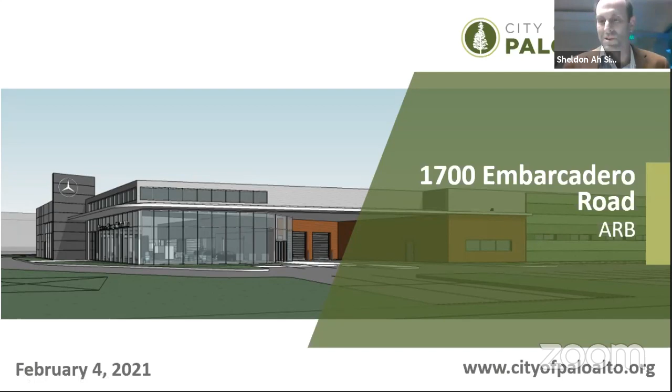So here we are. So some things change and some things remain the same. Welcome to the new year. We're back with another iteration of this site. We'll go a little bit more about the background here in just a moment. Great overview by the chair. It's a preliminary review of a commercial project located on 2.5 acres. And this is just at the corner property. Does not include the Audi site.

It is zoned CS with the site and design combining district as well as automobile dealership combining district. Request for the applicant would be an architectural review, site and design review, as well as design enhancement exception for setbacks. And we're just here to review and provide some comments to the applicant as well as to staff.

This site has been a subject of many projects and as well as hearings, 16 public hearings to date. The site is a vacant site, a former restaurant that was closed in 2014. The site was rezoned to CS from industrial in 2009. A hotel was previously approved in 2013, but that entitlement expired in 2015.

An automobile dealership was proposed in 2015 for the site. That project went all the way to the city council, and then it was directed back to the ARB. It was deemed too big and didn't fit in with the context of the Baylands, so the applicant withdrew their application.

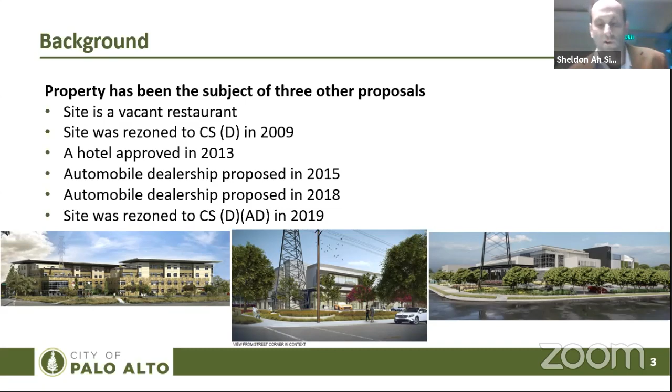So a little bit about the site context. It's located in an area that's predominantly commercial and office use. The two properties adjacent along Embarcadero Road are dealerships, the Audi and the Honda site, and there are also some automobile uses behind on one of the streets there.

The properties in the area are generally characterized by larger buildings with large setbacks and surface parking. The one exception is the Audi showroom, which has the closest setback to Embarcadero Road at about 30 feet. All the others have larger setbacks.

On this property, 1700, there's an 80-foot easement along East Bayshore for various utilities, including the overhead transmission line. This precludes structures from being built there, especially height-wise, with a height limit of 15 feet for structures, which includes vegetation.

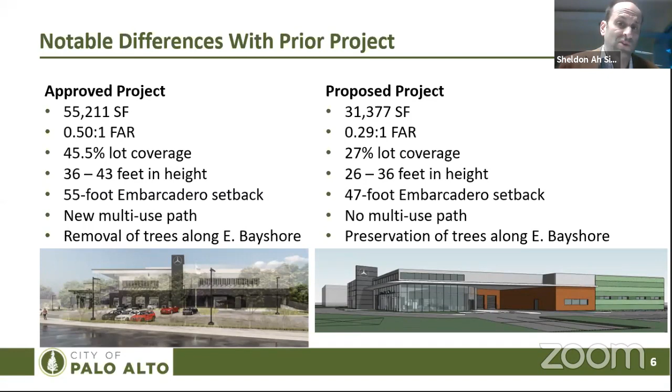The approved project had a multi-use path; this project does not propose that. The approved project proposed removal of trees along East Bayshore, and this project does not propose that at all — it preserves those trees.

A little bit more about the site plan massing. It shows that it will follow the predominant pattern in the area, with larger setbacks, surface parking, and the building situated in the middle.

The CS zone does require build-to setbacks, which mostly makes sense in the El Camino Real area to get the building close to the pedestrian realm. This is an automobile dealership, an automobile-oriented use, and coupled with the easement constraints, it supports the design enhancement exception. The height of the building would also be mostly consistent with the surroundings.

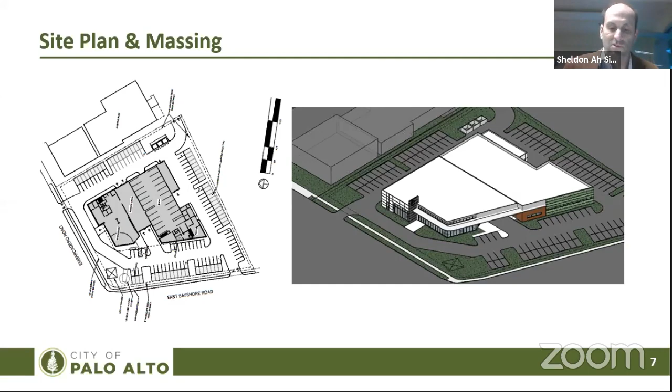Again, 26 feet — it's a standard two-story type of building. The covered drive-through for service is exempted from the gross floor area, consistent with the automobile dealership combining district, and that area is 4,400 square feet.

Just showing some of the floor plans here. The exhibit breaks down the showroom in yellow and the dealership area in green, which includes the service area — the service drive, as mentioned, is excluded. There's a little bit of limited second floor space with some offices and storage areas.

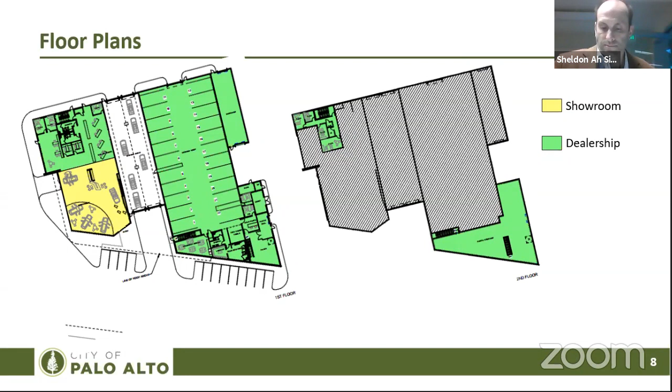So going to the elevations here, and the applicant will discuss more about the materials. The project is again 2 stories in height in some areas, but it does roughly maintain that 26-foot plate. And then you have that 36-foot architectural element, which would have the future sign.

Along this elevation, the building and the site have kind of an irregular shape. But generally here at the corner, you have the showroom, which has the fenestration. And then you have some of those elements that are consistent with the brand of Mercedes, which is that black color, the silver colors, so that metal that's being used there, and some of that white.

They are introducing some of that reclaimed wood siding, as well as a landscape wall, which is more consistent with some of the features that we had in the prior element of the prior project, trying to bring in the consistency with the baylands.

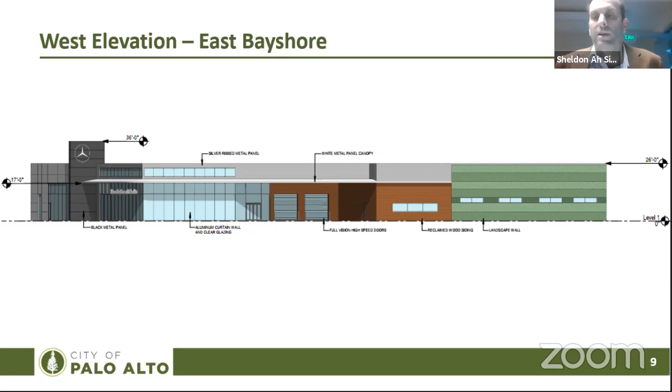And on the opposite side of Bayshore faces Audi. Then here you have the silver panels closer to the street. And then as you get towards the rear of the property, it transitions to a stucco type of material.

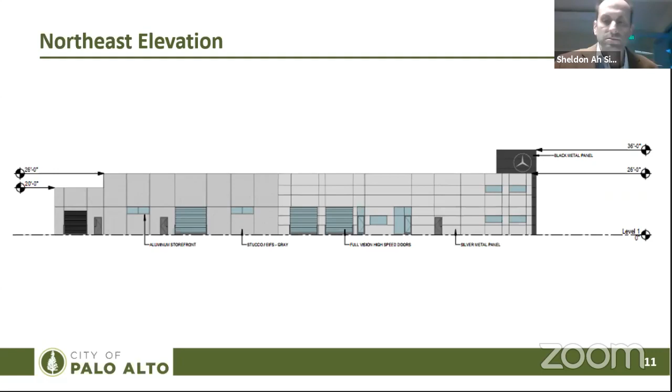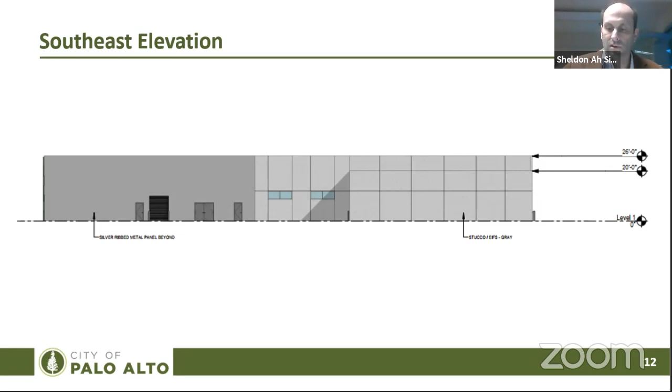And opposite of Embarcadero, you can see on the left side a little bit of that landscape wall really terminates there. And then it transitions to paneling closest to the street, and from there it turns to stucco towards the rear of the building. This is the side with the car wash.

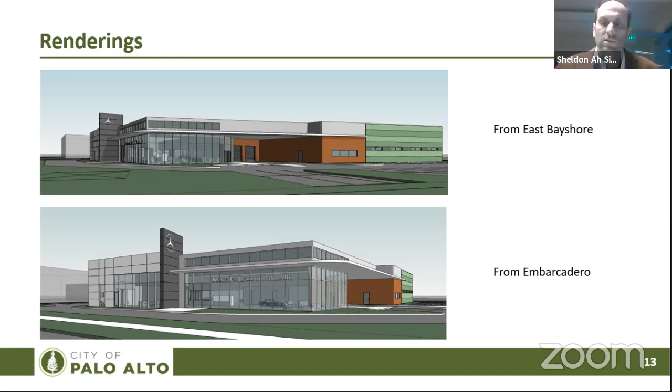So the renderings just show a little bit more detail here. Obviously, this is at the preliminary stage, a little more conceptual. We'll ask for more detailed, contextual types of exhibits for the formal submission.

With the landscaping, as we expect with a smaller footprint, the project on the left side, prior project on the right side, you have more opportunities for landscaping. And as I mentioned, they are saving those trees along Bayshore Road and Embarcadero Road.

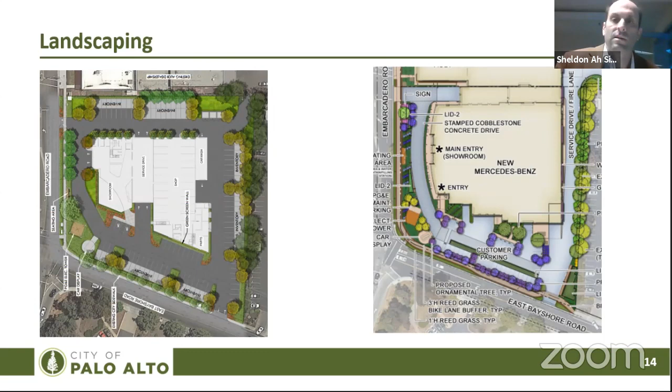Some considerations here to think about, and what we're looking for is some feedback from the board on how the project fares against the required findings. Some of these are just relationship to the neighborhood setting, the context, the transitions in scale to adjacent properties, as well as the scale and mass, and then architectural design theme

cohesiveness, use of materials. We need to consider how the project is consistent with the Baylands master plan: to use only muted natural colors, choose materials and finishes that will weather well, preserve the horizon line with low and horizontal elements, reduce the size and signs and mounting heights of regular signs, and also just design for practicality.

I think we have a lot of experience on this site with the other two projects, and this project tried to bring some of those features here, which we can probably hone a little bit more. And then lastly, just the pedestrian-oriented design.

And so that brings us really to the multi-use path, which I think is something worth considering to look at. The city's bicycle pedestrian master plan does indicate that there's a class 2 bicycle facility along this frontage, but when you actually go out there, that does not exist. There's no facility such as that.

The plan does not prescribe how to address a gap in that situation because it assumed that there was something there. We knew that, staff knew that. So when we were having discussions with the prior applicant for their request, and their request again had a legislative request for the zone change, we negotiated to get this gap reconciled. So this multi-use path was something that was proposed by the prior applicant.

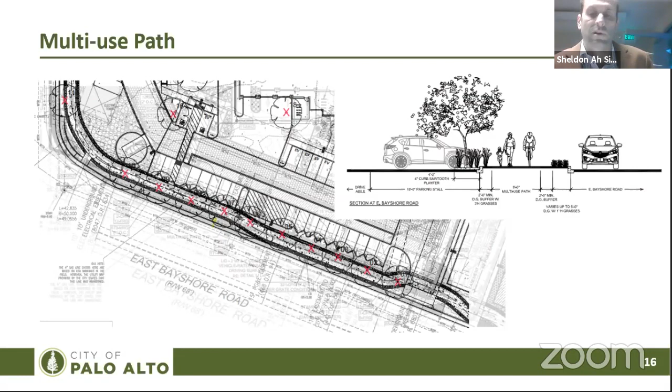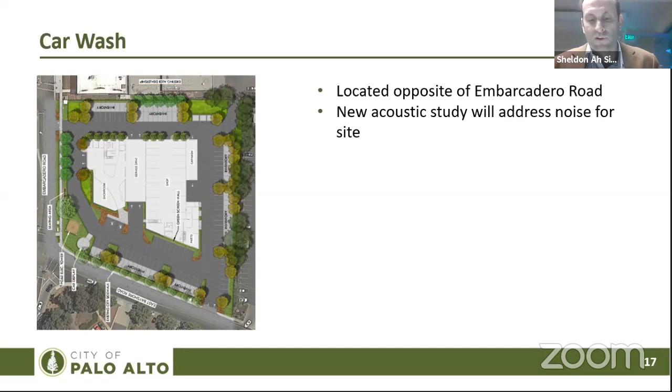The other issue we noticed with the last project was a car wash still facing the neighboring property that had the objection to the issue. So with this project, we'll have to have a new acoustic study that will address the noise for the site. The site does not have any backup generators, so that would help a little bit. But certainly we will have an updated acoustic study that will address the issues and be consistent with the municipal code. So that ties into CEQA.

The prior project had included an adopted mitigated negative declaration. We would propose to provide an addendum to the previous document, and we'll include updated studies, which are acoustic and traffic analysis, that will be included with the formal application. So with that, we'll be conducting the public hearing, provide direction on the project, and the applicant will consider those and file a formal application.

Staff recommends that ARB take the following action, which is to review, provide comments, and no formal action is requested. So with that, I conclude my presentation, and thank you.

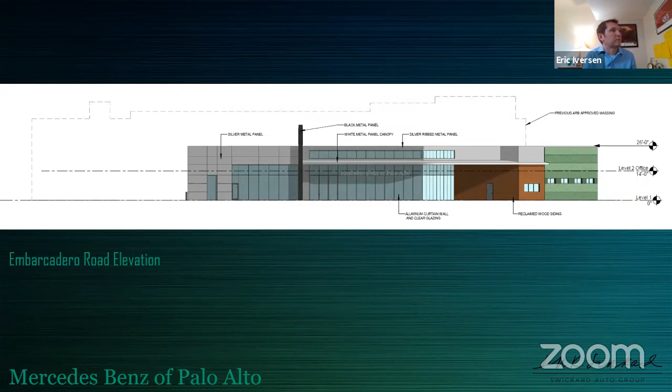And again, this is the side view from Embarcadero. You're starting to see some of the fun stuff, which is the reclaimed wood siding and the landscape wall to really break up that overall facade. You have the modern glass and architectural composite panels along the front going into a reclaimed wood product.

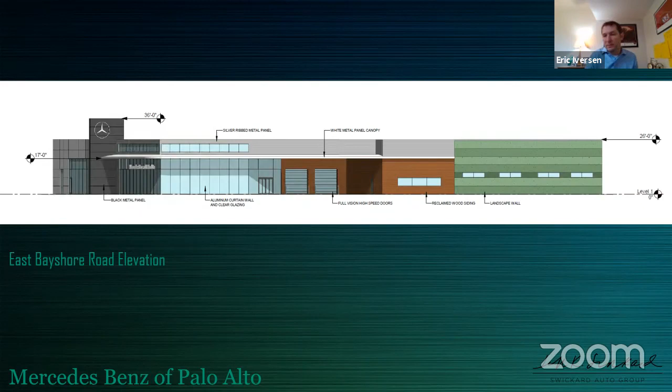If anybody has any questions, I could talk for 15 or 20 minutes just on how awesome and cool reclaimed wood is. And I think landscape walls are great, especially in the climate that we have in Palo Alto.

The plan itself on the inside does separate what we call front of house and back of house. Along Embarcadero is the front of house with the showroom - it's the part of the car dealership that we're all familiar with. Showroom, service writers, separated with a service drive that has opening and closing doors. Weather is great maybe 9 months of the year, so those doors will be open during the day but closed at night for the service drive.

And then the actual service shop with 22 bays to work on cars. The car wash, in this proposal as opposed to the previous one, is attached to the building, so it's approximately 40 feet further away from the property line than the previous proposal.

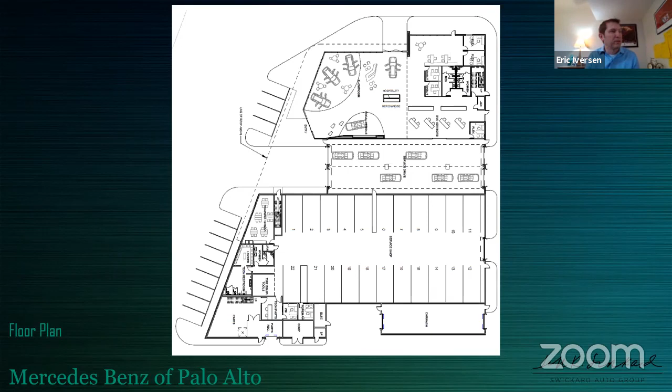So the acoustic study, as Sheldon mentioned, we will get that updated. We've talked to the same acoustic engineer. Common sense tells us that moving that facility farther away from the property line will only reduce noise.

We've brought on the same landscape architect that had worked on one of the earlier proposals, and I think we have ourselves a pretty good landscape plan. Again, preserving those trees along East Bayshore is critical, at least in my mind.

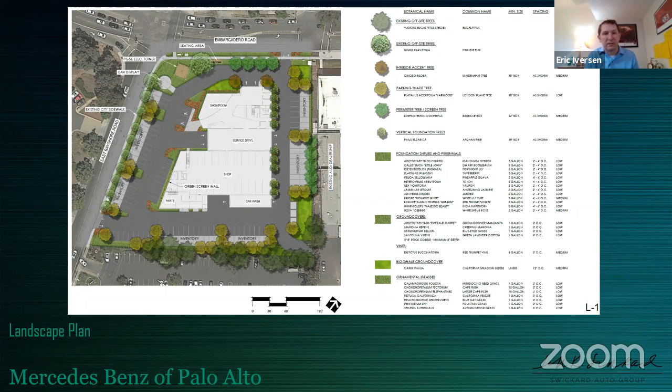Reclaimed wood product - like I said, I could talk for a half hour on that. It is an awesome product. The company goes around to churches, anything that's being demolished, not only in the United States but around the world, and they salvage it. They re-mill it, replane it, and then send it back out to get installed on a building.

The green wall that we talked about is not just vines growing up the side of the building. It is actually a green wall with vertical planters, and should an area or planter die off, they can be removed and rehung with a new one grown in a nursery, to always have a fresh green wall appearance.

And then finally, once again, my favorite trees. I don't think I'm going to stop talking about my favorite trees because they provide excellent shade. They are under and adjacent to high powered lines, so it would be really hard for us to replace those with anything that's going to get much more than 8 to 12 feet tall. Here we have established trees that provide excellent shade, whether you're walking or biking on the street, either way.

So that's all I have. I am able to answer any questions, and our architect, engineer, and landscape architect are all here to chat with everyone.

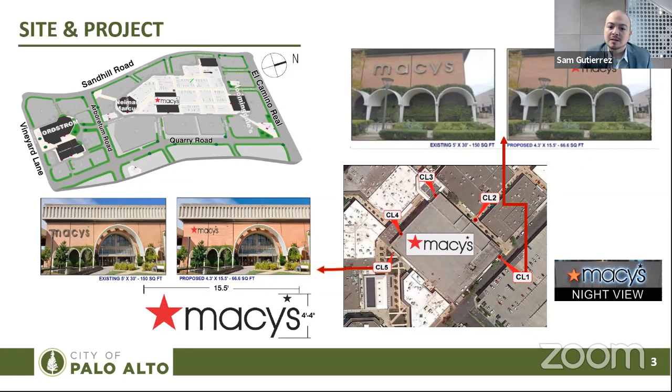So here's the site. Again, we could see the Macy's located here. I hope you all could see the cursor as I'm hovering. These are the proposed large signs for the Macy's with their relative location pointed out. It should be noted that the signs are illuminated. So the star logo, the corporate Macy's star logo, is internally illuminated, while the Macy's copy is halo illuminated.

So here we see that there are other signs located at the corners, and I would say the interior mall entry at CL2, over the doorway there with the awning. And then you see to the left on this slide the corners of the Macy's building. If you're entering from the parking lot in Sand Hill, or coming from further down the way, like towards El Camino, and you go down that walkway, you'll encounter these signs at the corner of the building.

Again, the applicant's proposing to change out these signs. Just a note, the brick panels around the facade of the building are 24 feet wide, with pretty large band spacing - there's about a 5-inch separation between each of the facade panels. So that's just something to note as the ARB considers the proportions of the signs and the layout on the building.

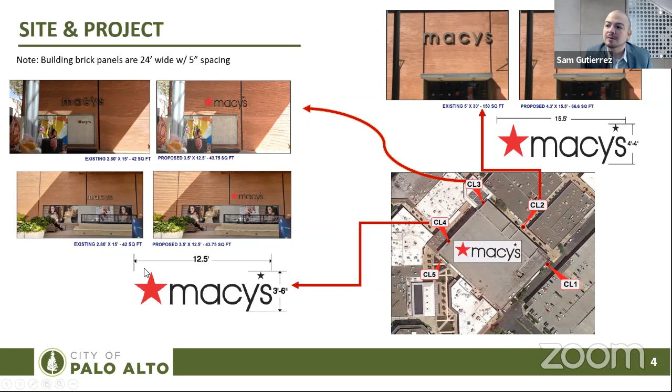So the existing signage versus the proposed - again, the existing signage does not comply with the master tenant facade program. It does comply with the sign code, however. If we were just to apply the Palo Alto Municipal Sign Code from Title 16, the signage on the building, the wall signs, does not exceed the limitations per that code.

The applicant is proposing smaller signs than what's existing. The conflict is that if we apply the master tenant facade program limit for the signs, they would be limited to only 24 inches tall - only 2 feet tall - where I believe the existing signs are approximately 5 feet tall. So that is a very dramatic change. And again, this is one of the largest buildings in the entire shopping center. So it is interesting there.

This is considered a four-sided building, and it doesn't touch any other shopping center mass or continuous buildings with smaller tenants. It is a standalone, though it does have one of the arcades over it that spans between the buildings. So here's this additional signage that was brought up.

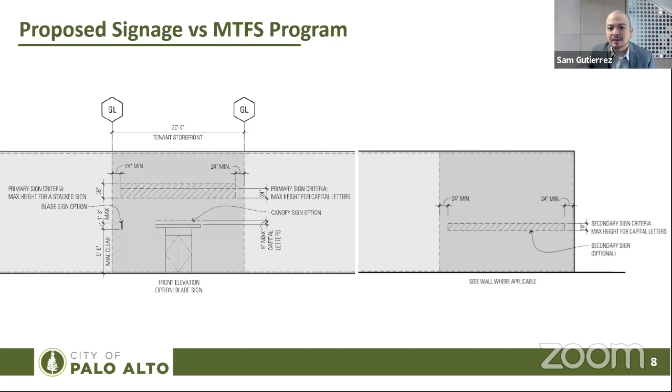Moving on, we have the sign exception, which again requires findings to be made in support of the approval. This one requests to exceed the maximum number of signs, total number of signage, and the height per the approved Master Tenant Facade sign program—again, the 24-inch height limit. Here we have identified them in bullet points.

The sign exception again requires findings that there are exceptional or extraordinary circumstances or conditions applicable to the property that are generally not applicable to other properties there. Considering the shopping center as its own kind of neighborhood, since it's surrounded by Stanford land, a mini forest of redwoods, or medical buildings, and then there's the Ronald McDonald House on Sand Hill, and some retirement communities further down before you reach the medical center—looking at that, if we were to apply the Master Tenant Facade program as-is to the Macy's building, it would be a little strange.

Considering how large the Macy's building is in comparison to the standard tenant spaces, which are approximately 20 feet tall, this one is over 50 feet tall with a large facade. We're talking about a building that's over 200,000 square feet of retail space, versus the standard tenant space in the shopping center, which varies from about 1,000 to 10,000 square feet. There are some larger buildings, like Flemings or Wilkes-Bashford, that do have more square footage, so it would seem a little strange to apply the Master Tenant Facade program there.

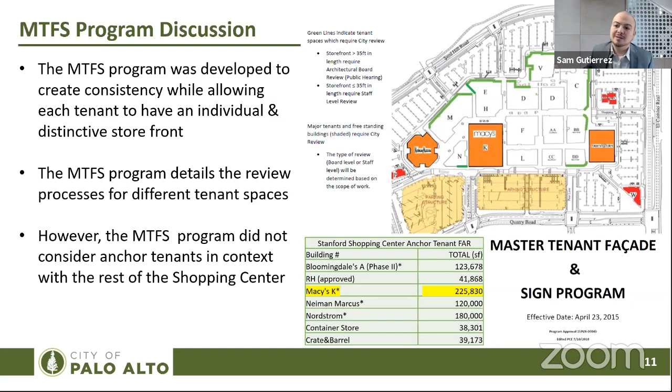So that's where we would seek some more conversation there. The intent of the program was to be adjusted over time, so we could modify and change things, understanding that the retail environment may change over time at the shopping center. So that is where we have potentially an opening now to make some modifications. Staff does seek the guidance of the ARB on refinement, suggestion of where we would go forward from this.

And again, this is the parameters here for the shopping center signage in particular. We could see that this table here seems to better fit with the smaller tenants, but when looking at the limits of the signage and the size, it doesn't really seem fitting for 50-foot tall buildings, over 100,000 square feet in floor area.

So in the staff report, it was noted that we suggested perhaps a starting point conversation might be that the maximum signage could be considered perhaps 80% of the wall area allowed by the Palo Alto Municipal Sign Code. That's noted here in Table 3.

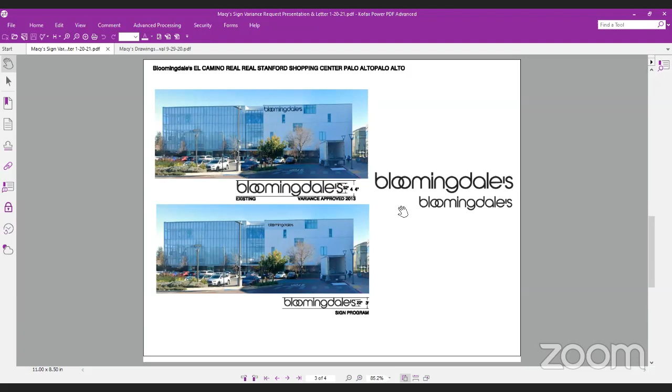Bloomingdale's was a couple, I think, almost 8 years back now. And the same thing, this bottom one here would have been what was allowed by the sign program, and the top view is what you allowed, gave us a variance for.

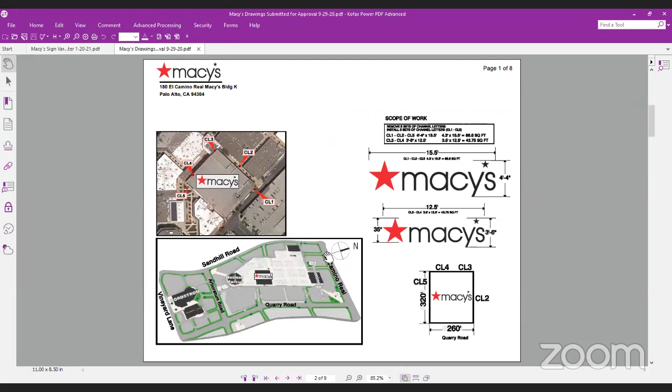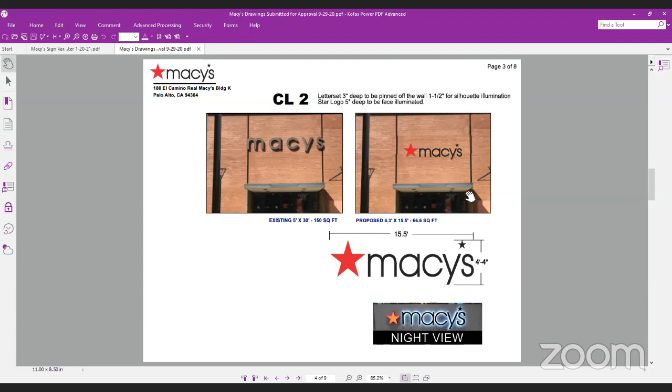This is the side of the building that faces the new parking lot. I guess that would be the south side of the shopping center. This one faces, if you could stand there and look all the way to the other end of the mall, you'd see it. And then this one's the one we started out looking at. So other than that, I guess I can answer any questions you have.

Thank you. Does anybody on the board have any questions for staff or the applicant? I do. Go ahead, Board Member Hirsch. Yes, in our package here, the pages aren't numbered. Oh, yeah, page 4 in our packet.

The Macy's sign that faces, well, let's say the plaza area where the Apple store is, it shows the Macy's overlapping the line on the left side. Let me go to that slide. You're talking about this one, correct? No, no, facing this one. You're talking about this one? Yeah. I noticed this when I got ready to do this presentation today, that we had an old photo in there showing, but this is how we want the sign to look.

Okay, I'm not quite sure. We've gone through several variations, sent it to the mall for approval and Stanford for approval and getting it to Sam and back, and it looks like I made a mistake in there.

Okay, so just one more here, just to make sure. On page 6 of 8, where there's a lower display, the display windows, the one CL5, could you go to that one just to make sure that it's doing what I see on the drawings? Yeah, I have. Okay, that one and that one. Is that where it's going to be? The one to the right there?